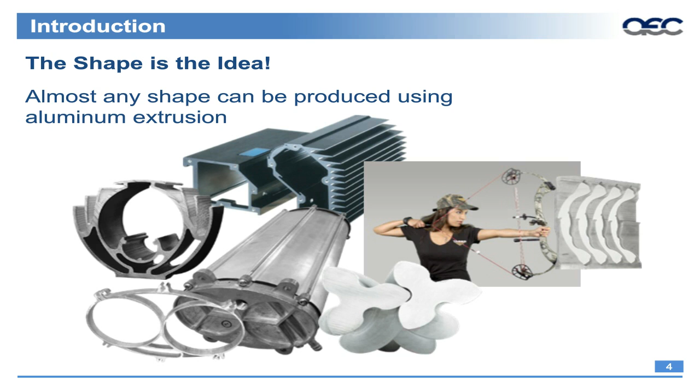As an introduction, we'll talk about the right geometry. We'll also talk about the alloys and the designer's use of fabrication and finishing to create effective product solutions.

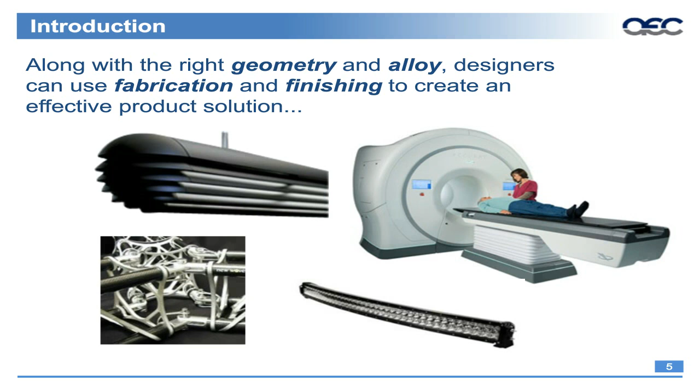On this particular slide, we have highlighted four examples of different uses of design and alloy characteristics and fabrication operations within aluminum extrusions. In the upper left-hand corner, you actually see an LED light where that outside diffuser cover is a fabricated anodized aluminum extrusion. In the bottom left, we have the nodes creating the structure of that particular part, as well as heat sink applications when we're looking at MRIs or CAT scan machines, and also LED light bars.

In addition to the functional and decorative applications we see today, we're using aluminum extrusions in high-intensity LED applications, such as the medical light you see in the upper left-hand corner, as well as intense structural applications as with the Ford F-150 in the upper right corner. The decorative application is in the bottom right with the fencing structure. We'll talk about that later in the presentation, as well as decorative finishes in consumer electronics, where you look at the new Apple Watch with the extruded aluminum and anodized case.

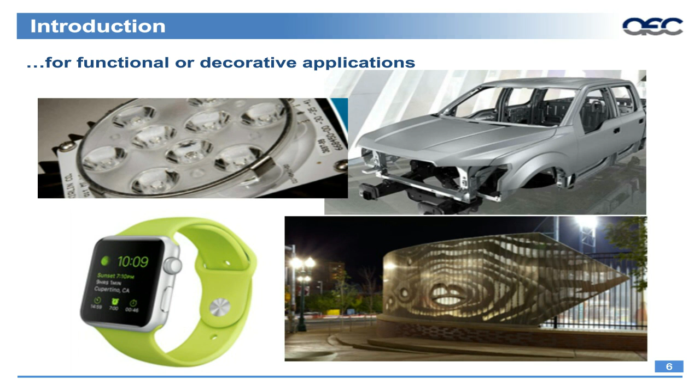Overall, the extrusion process is fairly simple. We're talking about forcing a material through an opening in a piece of tool steel. A very simple example of this is the Play-Doh press. Here you can see the Play-Doh press, which maybe our children or we as children played with as a youngster, where you have shapes cut into that plastic piece that sits at basically the mouth of the press. The Play-Doh or the material is put in the back, and then it's forced through that hole.

So the material itself has no choice but to come through that hole and to take the shape of the opening that was cut. An interesting thing about the aluminum extrusion process is what most people want to know is

How do we create hollow profiles? Hollow profiles are relatively simple in that when the billet is forced through the die itself, the die is fixed with a mandrel in the middle, and then you would have the bracing for the mandrel on either side of the larger opening. The billet itself, once it's forced through that opening, is actually broke into two separate or sometimes multiple pieces. And then as it flows back through the larger opening, is basically welded back together and forms the tube, as you would see in the lower right-hand corner of the screen.

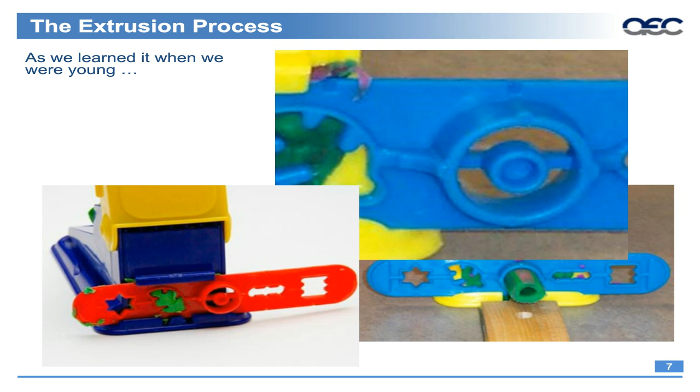So again, the extrusion process, as we know it today as an aluminum extruder, is much the same. We have a preheated aluminum alloy billet that we force through high pressure through a piece of tool steel. And then as that material flows through the tool steel, it takes on the shapes in the pockets, and then it emerges from the press in the desired shape that was created as it flowed through the die itself.

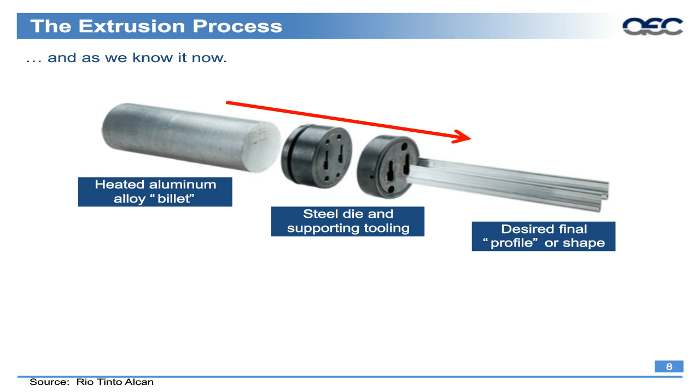Here's an overview, a very basic overview of the extrusion process. As I said before, we start with the heating furnace, where we'll preheat the billets, or in some cases logs. Those are then placed into the extrusion press, which is where the die is fixed onto the front of that press. So in this particular illustration on the far right-hand side of the extrusion press, once that billet is forced through the press, the die, it'll emerge onto a runout table and can most times be a couple hundred feet in length. There would be a rough cut sawing operation on that particular part there, and then

the long length extrusion would be presented to the stretcher, and the stretcher will pull it, clamp onto both the front and the end of the profile and stretch it straight. A finishing saw operation will cut it to a shorter length than what was extruded, and then the extrusions will be placed into the aging oven, where they will receive their final temper.

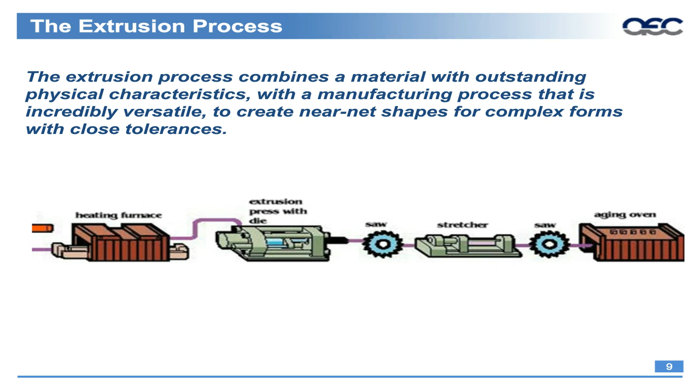As part of the extrusion process, we also put into the parts themselves is where they receive their temper in the final age oven practice, as well as how we treat them as we are extruding the profiles. Here you can see some of the typical tempers that are referenced within extrusion. The most common being the T1 through T6. Those would typically be the most common tempers that you would see associated with the different alloys that are produced.

There are some other tempers, as in the O temper, which would be for fully annealed material, which could be things like impact rod and or parts that need to receive a severe bend. F temper material, which would be things such as forging stock, and then the strain hardening tempers like an H112, which actually receives some hard working after extrusion.

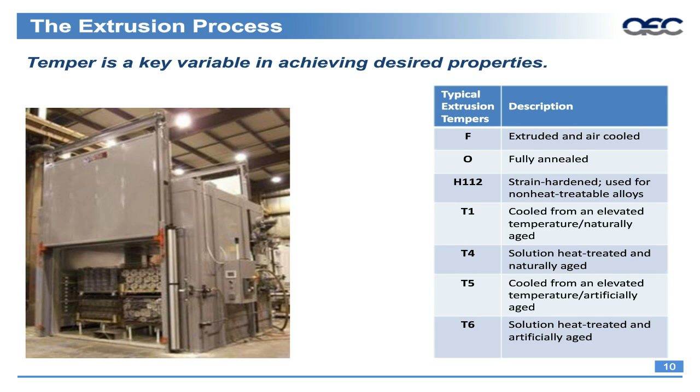However, some of the most important as we talk about aluminum is the high strength to weight ratio, its conductivity properties, as well as its suitability for integral shapes and production to close tolerances. Also talk about the decorative attributes of aluminum and extrusions, as we can apply many different finishes to the parts. And then the ease of fabrication.

So as we go through the next part of the presentation, we'll talk about several different products or projects that have utilized aluminum extrusions to create an efficient part.

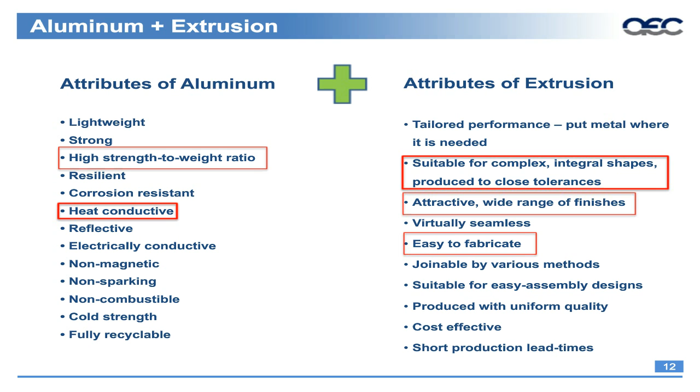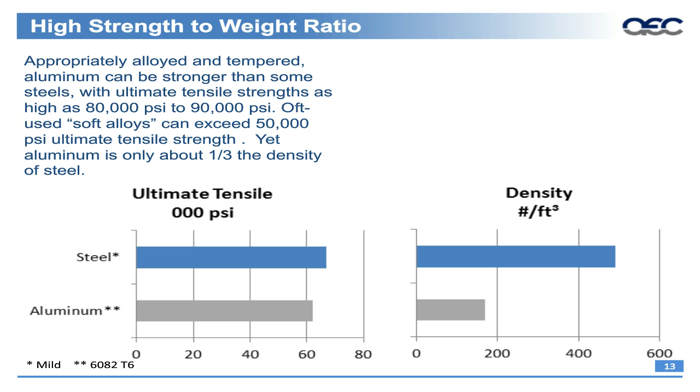With the high strength to weight ratio being a key attribute to aluminum, we can see here that in some alloys of aluminum, this one in particular is 6082 alloy, which is a structural alloy in comparison with mild steel. You can see that the ultimate tensile strength is much the same. However, the density of steel is much greater than aluminum. So when you look at it on a strength to weight ratio, you can sometimes yield a part that is almost nearly as strong as a comparable steel part, yet is a third as dense as steel, and therefore will typically weigh sometimes as much as half the weight of the steel part.

So one of the industries right now that's really taking hold and working on a lot of conversions of not only steel to aluminum, but different forms into extrusion—casting to extrusions, forged parts into extrusion—is the automotive industry.

In the automotive industry, weight is key in creating efficient vehicles, reducing weight while also making them stronger and safer. Here we see a couple applications in use today: a Ford F-150 roof bow, a Tesla Model S roof bow below that, and the C7 Corvette frame, which is an aluminum structure that's 90 pounds lighter but 60% stiffer than the prior steel construction. As we talk about more efficient vehicles, we need to create stiffer and, most importantly, safer structures for the automotive industry.

But key to this is not only the aluminum material, but also the profile design. As you can see in a lot of these profiles, specifically in the Tesla Model S roof bow on the bottom, the wall thickness of the part is not uniform around the entire profile. With an aluminum extrusion, you can actually move the metal and only put material where it's needed. This creates not only a stronger structure by customizing where material goes, but also a more cost-effective structure since you're not using more material than necessary.

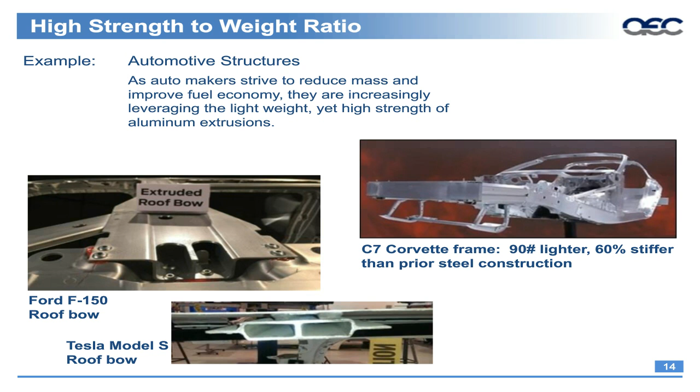Here's an example of a bridge application. In building and construction, weight is important not only because you need to transport the structure, but also because you're assembling it in the field. With this particular application, you're transporting it into remote locations by truck or helicopter, which makes a lightweight structure very important. You're also looking at quick assembly—putting up a bridge in only an hour and a half with a relatively small number of workers, in this case 10 to 12—yet it can span up to 60 feet.

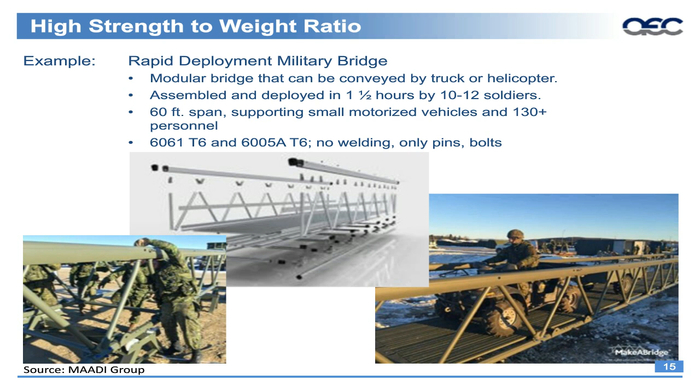It uses nothing out of the ordinary as far as alloy and temper: 6061 T6 and 6005A T6 are both very standard and commonly used in extrusions today. There's no welding needed—it's assembled only with bolts and pins. So this is an example of design coming together with the attributes of aluminum to make an efficient, relocatable structure.

Another interesting point about aluminum is that as it gets colder, there's no adverse impact on the material itself. That's important for this gentleman on his snowmobile doing a flip, where the aluminum structure operating in a cold environment won't crumple when he lands. A better real-life example is a plane operating at altitude, where it's negative 70 to 80 degrees Fahrenheit—not a place where we want brittle material. Aluminum is key because it not only gains strength as it gets colder, but also becomes more ductile.

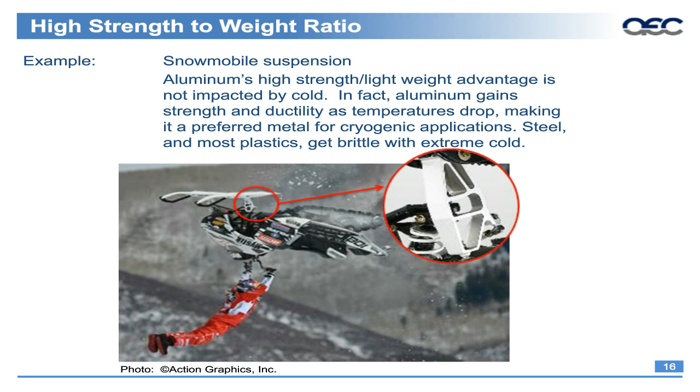Going further on conductivity, specifically of temperature—aluminum is a very efficient conductor of temperature as well as electricity, but here we'll focus on the temperature aspects. We have three separate graphs. From left to right, we see the thermal conductivity properties of aluminum compared to brass, copper, magnesium, nickel, and silver, with copper and silver being better than aluminum in thermal conductivity.

The next graph is density, where aluminum is actually less dense, while some metals are among the highest density—only magnesium is less dense than aluminum. When you combine the two into a value calculation, the biggest bang for the buck actually comes from aluminum, because it has one of the lowest densities plus is one of the better thermal conductors. Bringing those features together gives you a very efficient thermal conductor, which is why you'll see aluminum extrusions used from LED lighting to heat sinks to cold plates to electrical enclosures, plus other types of electrical bus conductors.

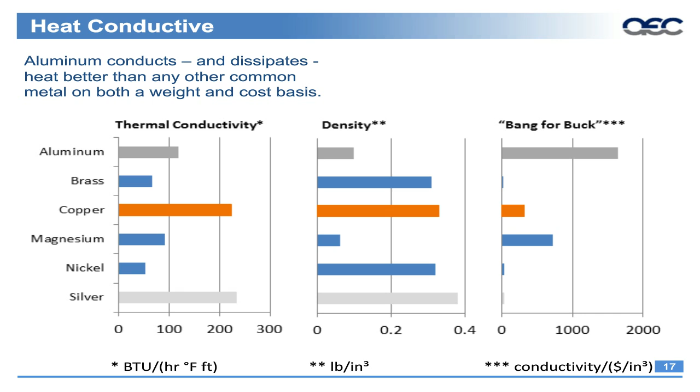So here again, with the relative ease of design and production of an aluminum extrusion, that's why you'll see it in all those various thermal products I just mentioned.

One other important attribute of extrusion is that it's a forging operation. When you compare forging to casting, you'll see much less porosity in a forge than in a casting. In a heat sink or conductor application, porosity is a very important factor in controlling the efficiency of that unit. Typically, just by switching from casting to extrusion, you gain something like 5 to 8% efficiency simply from the change in production method.

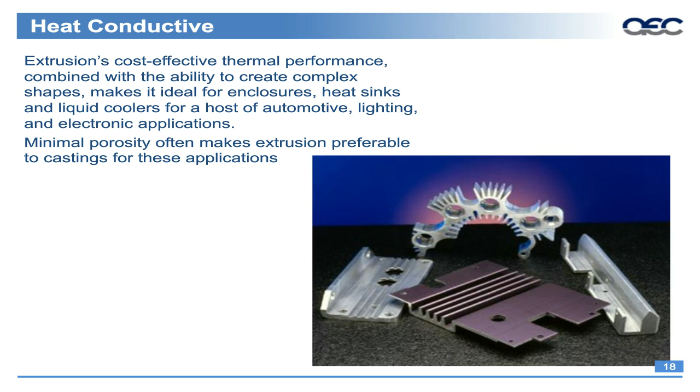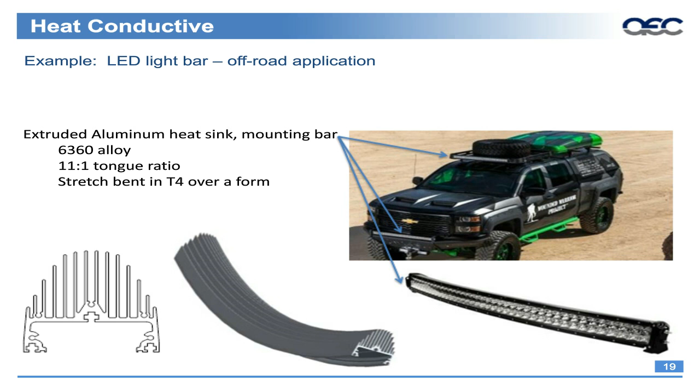a T6 condition, so it can mimic the front end of that vehicle that it's been installed on. Again, using the formability and the ductility of aluminum along with the thermal properties of aluminum. And in this one, it's also anodized black, so there you're using the finishing attributes of aluminum to be able to create a part for an off-road automotive application.

Here's another one in the automotive or transportation space. This in particular is a motor housing for a truck or a bus. Here you would have one of these motors on each of the drive wheels of the vehicle. It's important to note, so here obviously we're using the thermal attributes of aluminum itself, but then we're also using

the extrusion benefits in being able to create hollow profiles. This picture is not detailed enough, but inside each one of those profiles you would also see serrations, which increase the surface area within those hollow profiles, which helps make the heat sink properties of this profile better, in that there is fluid being passed through those channels in cooling this electrical motor that you see there.

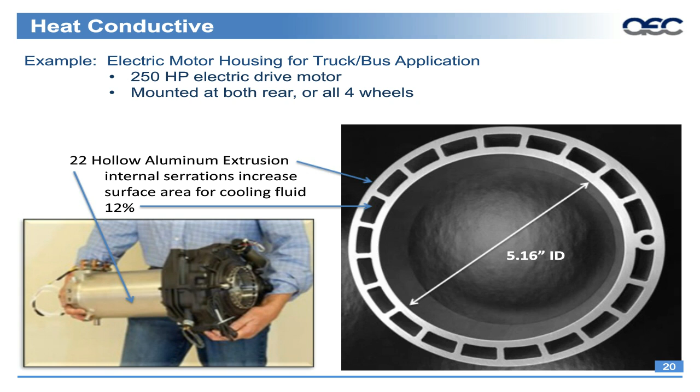So again with the heat conductive properties, here's one where we've actually utilized the extrusion properties and, let's say, tips and tricks within extrusion and how you join extrusions or affix them onto other parts. In this particular heat sink, the heat sink on the right is mounted onto the back of the LED light source on the left, and they've actually placed screw bosses at the required positions within the extrusion itself to be able to mount directly onto the LED light board with no additional machining required.

And again, as with the motor housing before, if you could see the individual fins here, you would actually see the serrations that were put onto the fins to increase the surface area, making it a more effective conductor of heat.

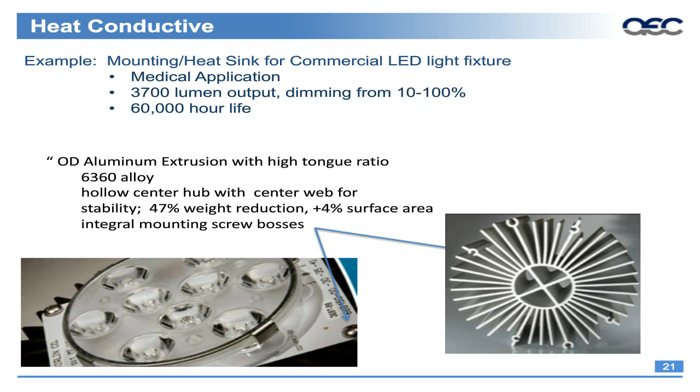Again coming back with the heat conductive, this is an interesting case in that you have one extrusion on either side. You can see it in the bottom left-hand corner of that picture there. So it's the same extrusion put on either side of the assembly. This is an illuminator viewing hood housing for a steam water gauge in an industrial application.

So in this one, taking advantage of the design characteristics and the ability to extrude complex profiles, they've actually added in all the particular bolt slots, screw bosses into the extrusion itself, and have basically eliminated 30 to 100 welds depending on the size of the unit in question. So it goes together through

a slip assembly. And then with this one, they also added the cooling fins onto the extrusion itself. So the only thing really you have to pay for there is just the additional material that goes into the cooling fins. Those are just added as a natural part of the extrusion process.

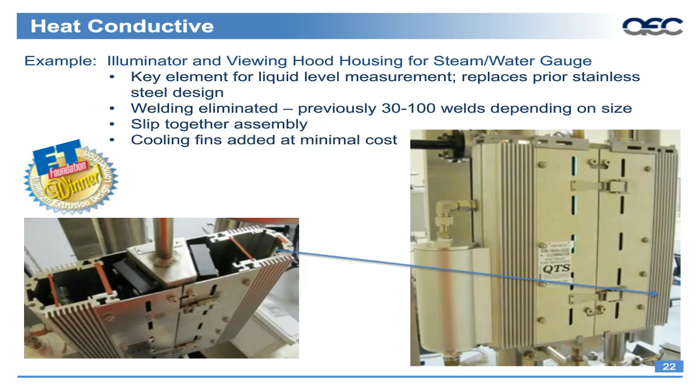The next several slides will begin to talk more about these integral shapes. This is just a picture of what we call the idea profile. It's not really a real world profile that's used anywhere, but it does give you the idea of all the different types of mating features that could be put into extrusion, from a hinge detail to screw bosses to bolt or rivet slots,

to then the decorative fluted appearance that you would see on the bottom left-hand corner of that extrusion, to snap fit and just the heat sink. So it gives you, in one shape, a lot of the different features that you can build right into aluminum profiles.

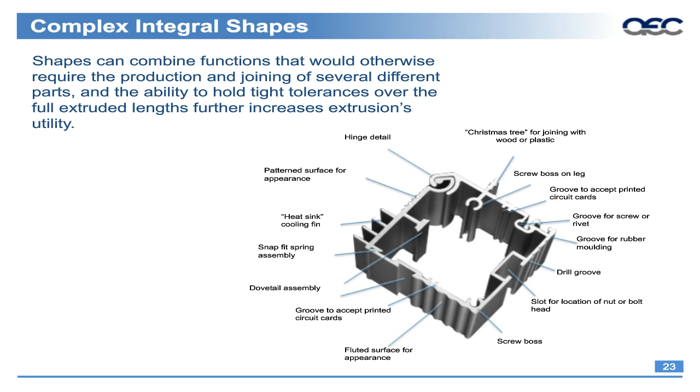As we start talking about the aluminum profiles a little bit more, we start talking about the integral shapes. A little bit later in the presentation, we'll talk about the economics of a shape and the cost associated with the development of the different dies and everything that goes together.

So like with the automotive applications before, this is an instrument panel beam. One of the interesting things about this is that these particular beams, obviously there's one in every car, but they're very part intense. This particular one for extrusion uses 19 separate extrusions to make up all these different support structures as well as the brackets that go onto it.

But the interesting thing about this, and what we'll talk a little bit more about later in the presentation, is to do this in extrusion with the extrusion tooling required is much more cost effective than it would be to develop individual stamping dies, casting dies, maybe some forging dies, depending on the requirements of the parts. We can easily do it very quickly and very economically with extruded aluminum profiles.

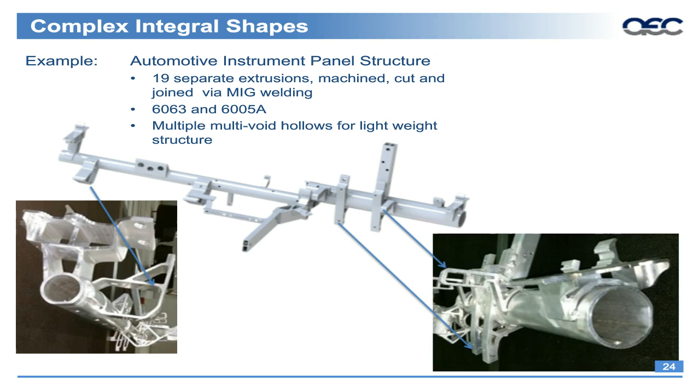Here's another one in a healthcare application where basically you have telescopic profiles. Here you have basically 3 to 4 different profiles that will come together that will create this structure on the left-hand side of the screen, which goes across and enables the movement of people out of beds or in and out of chairs if they're unable to do it themselves. Just a few profiles integrated together can create a very modular structure that's able to be customized depending on the setting it's installed into.

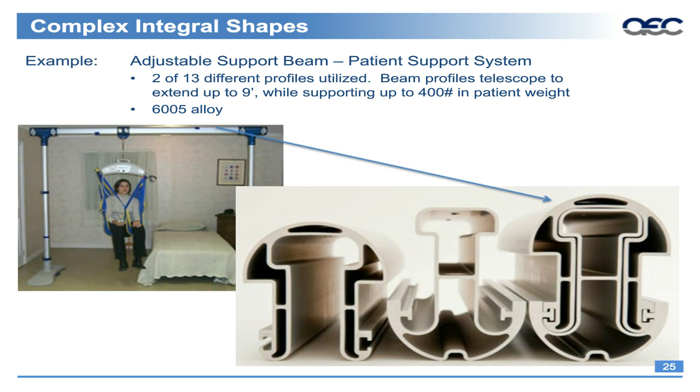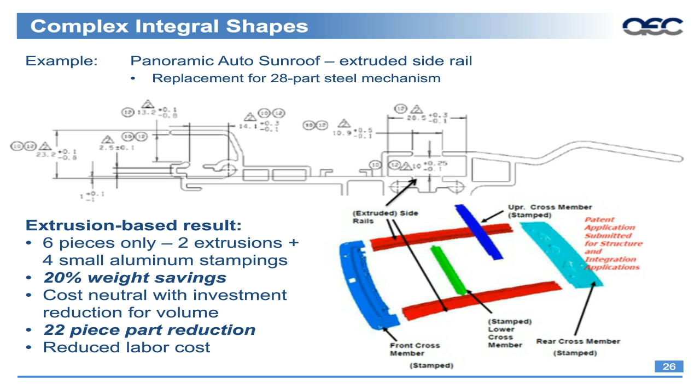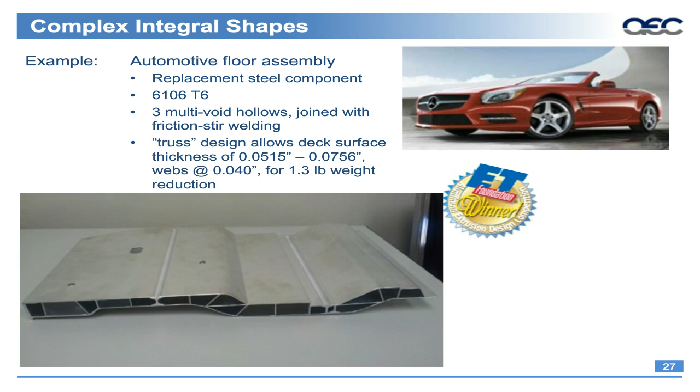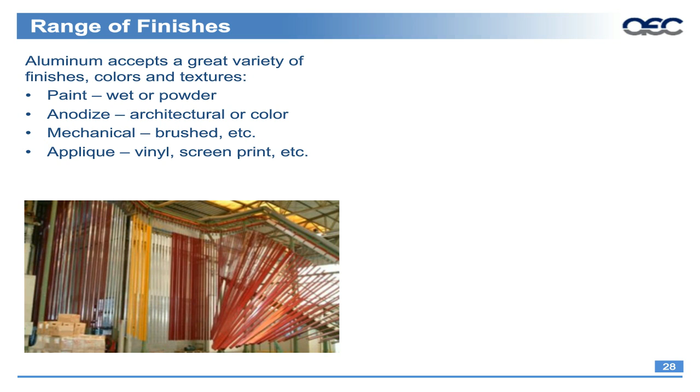So aluminum accepts a wide variety of finishes from paint, either wet or powder, anodize, from architectural clear to the bronze and the blacks to the high vibrant colors that you'll see, mechanical finishes, brushing and polishing, as well as screen printing or vinyl printing onto the extrusion itself.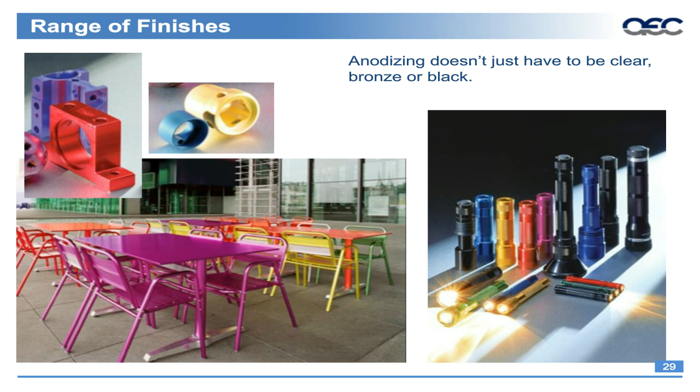Again, talking about the range of finishing, anodizing doesn't have to be just clear, bronze, or black. There are many decorative finishes that can be used, as well as industrial type coatings that you'll see on things like hydraulic cylinders and other parts like that. A very wide range of finishes that can be used in aluminum extrusions or with aluminum extrusions.

Again, another example of finishes. This one is a particular company based in Minnesota where they're using the high-end architectural finishes for finishing out commercial spaces.

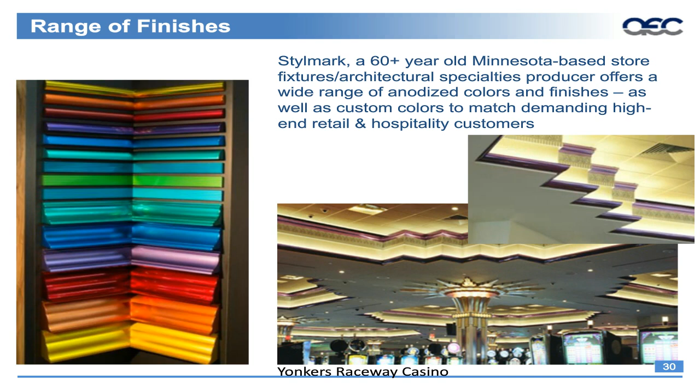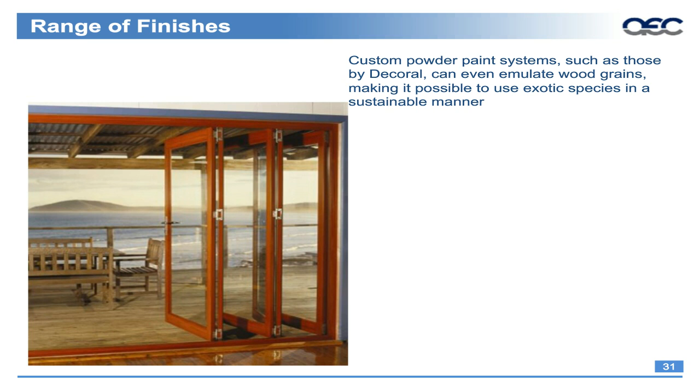The Decoral finish is a particular finish of interest where that is applied. It's a combination of, let's say, basically a printing as well as powder coating or paint that comes together to create simulated different types of wood grains to stone finishes to many different things that can be applied to the profiles themselves, and really it mimics the natural finishes of those different materials, but in a sustainable manner.

Talked a little bit about this one before, which was a new project that was just installed this past spring, which is basically a fence around a baseball field down in Texas. In this particular one, we start talking about ease of fabrication. This is all one extruded aluminum profile that has been assembled together, but then the pattern in the fence is basically machined into the part. Some very unique things that can be done in architectural applications just in the fabrication of the part itself.

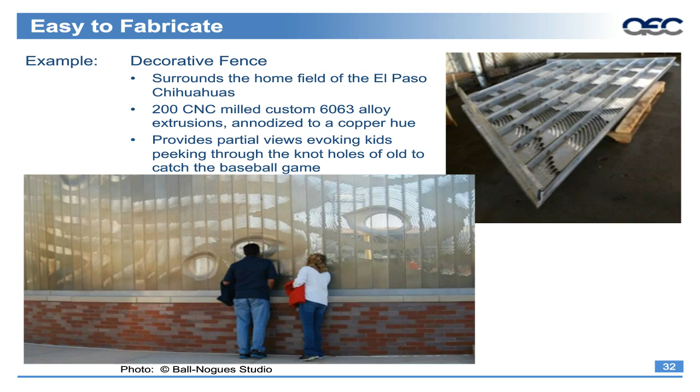As I mentioned before, there's a cost-effective aspect to aluminum extrusions, and here we'll talk a bit about the production cost of the tooling itself, as well as the time it takes to create that tooling. Aluminum extrusion has the lowest tooling cost of any of the metal forming processes.

So here you can see how this typically applies to stampings or moldings, die casting, roll forming parts, where you really have a huge upfront investment into the tools themselves. Now for aluminum extrusion, it's really governed by the size of the press.

A smaller press, die costs may be between $500 to $1,000. When you get into very large profiles running on, let's say, 16-inch presses and above, your die costs are going to be far in excess of $5,000 - probably more like $10,000 to $15,000. But as you compare it with larger parts and other metal forming processes, you're going to see a lot of difference there too. Typically the aluminum extrusion die cost is one of the lowest in metal forming operations.

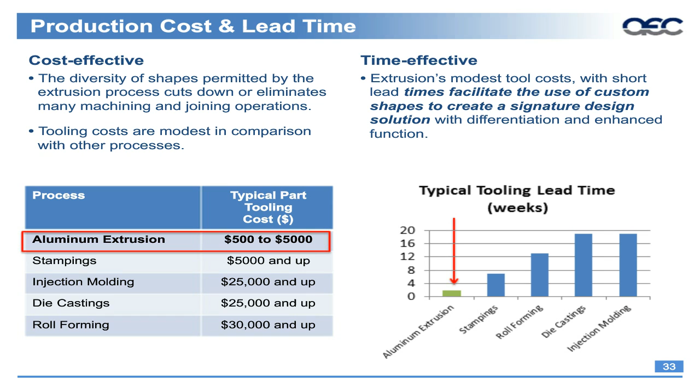There's been a lot of discussion over the years about the sustainability of aluminum. One of the key attributes is that it can be recycled over and over again without degradation. Recycling is a key part of the aluminum extrusion industry because it only requires 8% of the energy to recycle aluminum back into a new product compared to creating virgin aluminum. Obviously, the most energy-intensive part is creating aluminum from scratch.

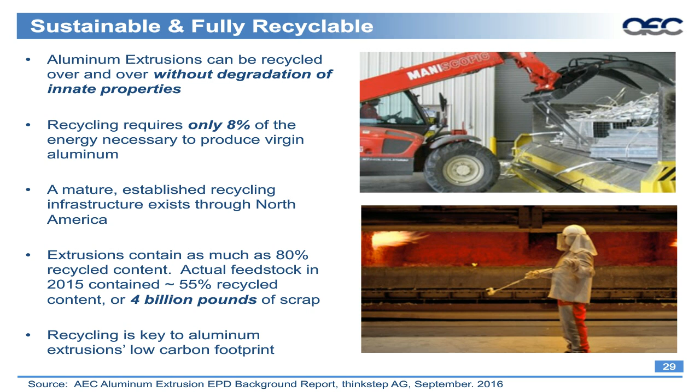Again, with sustainability, through the AEC we have just completed an environmental product declaration, which is available on aec.org. That'll take you through many of the different recyclability and sustainability opportunities with aluminum.

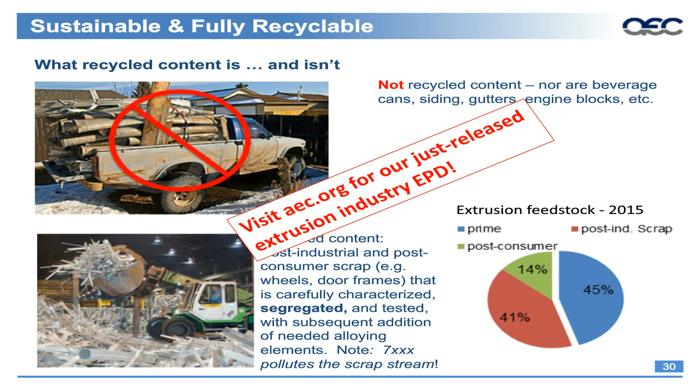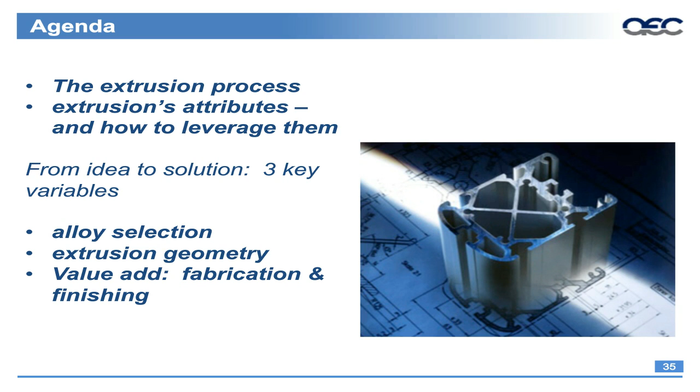For the second part of the agenda, we're going to focus more on the actual design of the parts themselves. So we'll look at alloy selection, the extrusion geometry, and finally the fabrication and finishing.

Some things to consider when we start talking about alloys: most of the time, what we're talking about in soft alloy aluminum extrusion is the 6000 series, which is by far the largest group, offering many different varieties of aluminum alloys within that series. The 5000 series is mostly your sheet and plate alloys. So 6000 is really when we're talking about soft alloy extrusions, where we focus.

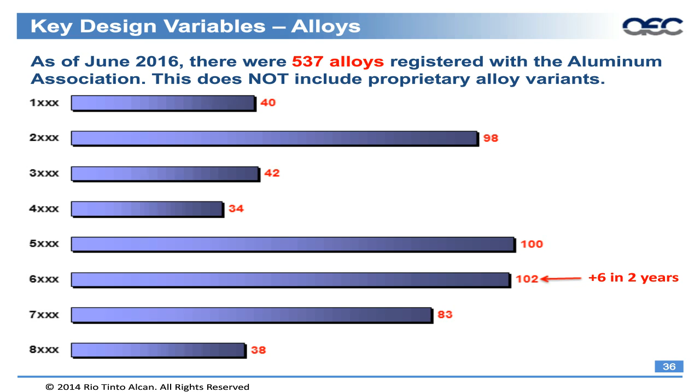6000 series typically uses magnesium and silicon as the main alloying elements. Within the 6000 series, we have good strength, good corrosion resistance, machinability, weldability, and formability. It's also heat treatable, which is key within our process to achieve all the different tempers that are required.

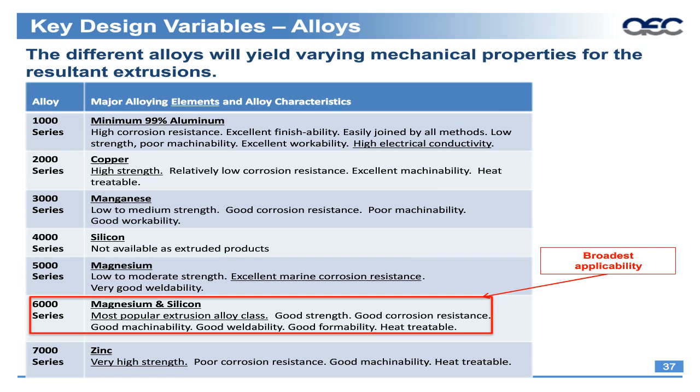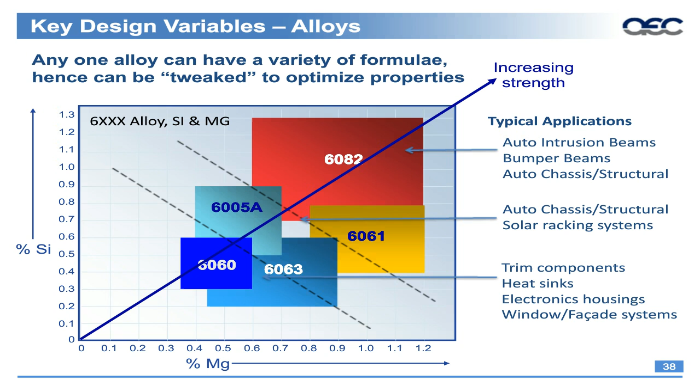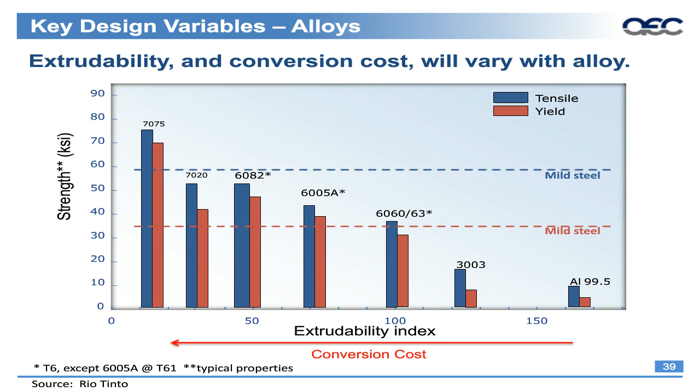It's important as you start to understand what the requirements are for your alloys, so you can select the appropriate alloy. Your extruder partner is there to help you make that selection, depending on the size of press it's going to go on, the end-use application, and the secondary finishes or fabrication operations that will be done to the part. All of those will drive your alloy selection as you're making the parts.

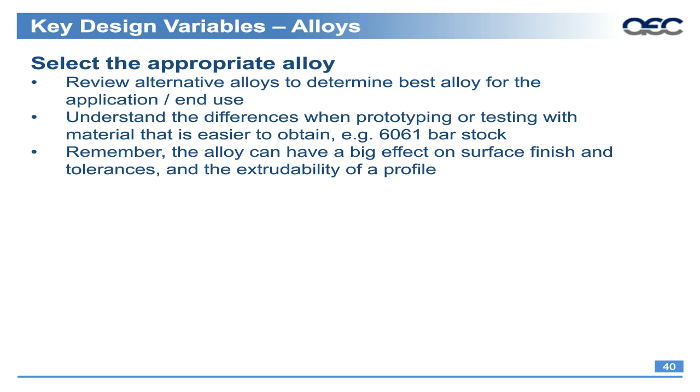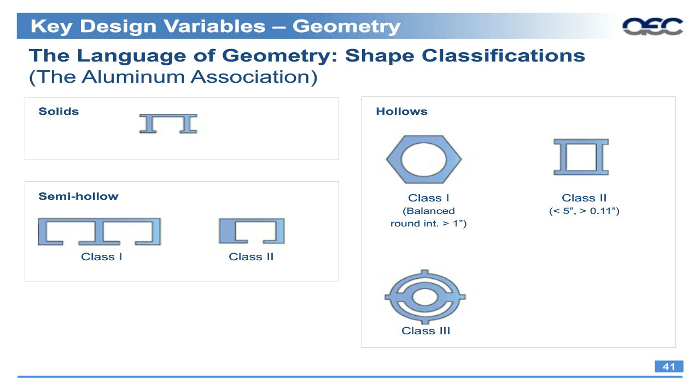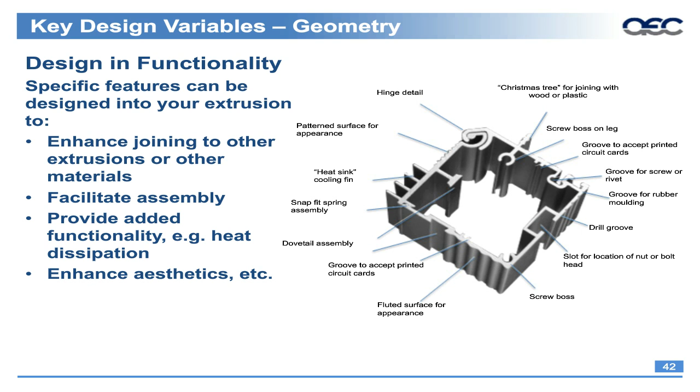Back to the idea of profile design and talking about design functionalities, which is key within the geometry. It allows us to join other extrusions together, facilitate assembly, provide additional functionality, and enhance aesthetics, all designed into the extrusions themselves.

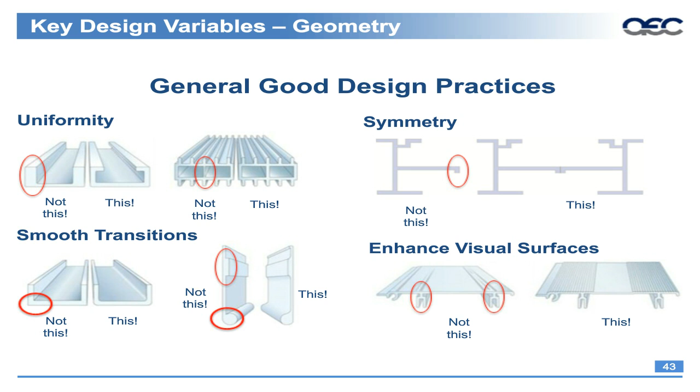For good design practices, we typically want to stay away from certain things. We like to have consistent wall thicknesses throughout, smooth transitions, and uniform profiles. That's not always an option; this is just a good-to-have that we'd like to see, but we can work around most requests.

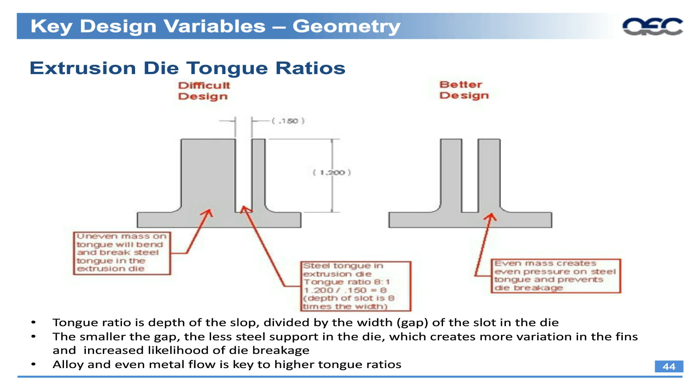Die tongue ratios are very important to us when we talk about the extrusion die and its wearability, because the extrusion die is basically a negative - everywhere you see aluminum corresponding on the die, you'd see a piece of steel, or you won't. So it's very important to discuss die and tongue ratios when we look at design and the type of tooling needed to make the part.

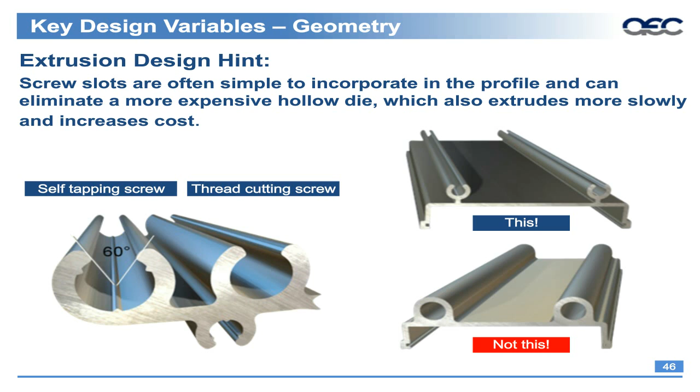We also talk about balancing and ways of getting rid of internal voids, making sure we have generous radius corners, getting rid of hollow voids in the middle, and if there are only pockets there to accept a piece of hardware, we can break that surface and have a solid profile there instead of a hollow one.

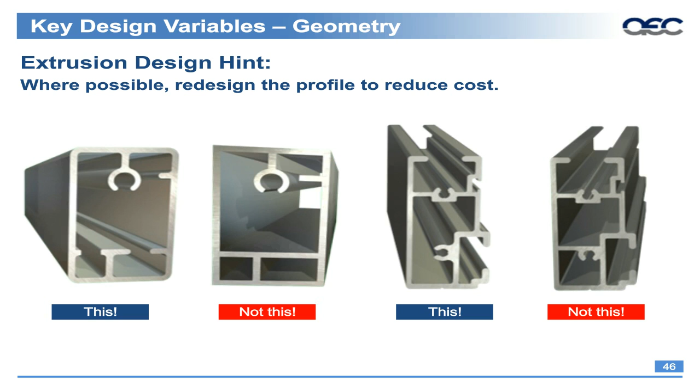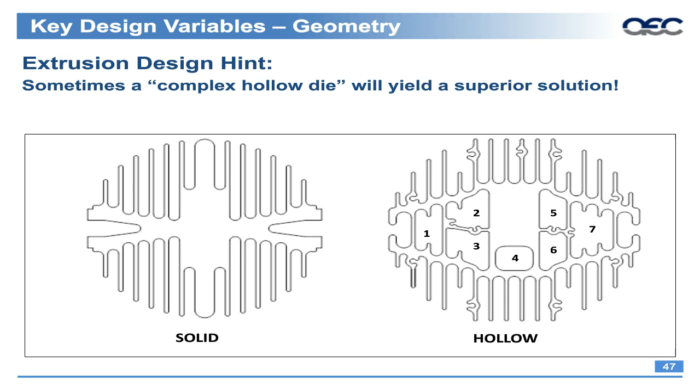Here's another instance where a hollow profile is actually better to produce than a solid one. In this case, we went from a solid profile with very high tongue ratios and added seven voids, but shortened the tongue ratio, added screw bosses, and added assembly features to make a better solution. Plus, with the added voids, we increased the surface area of the part, so it's actually a better heat sink than before.

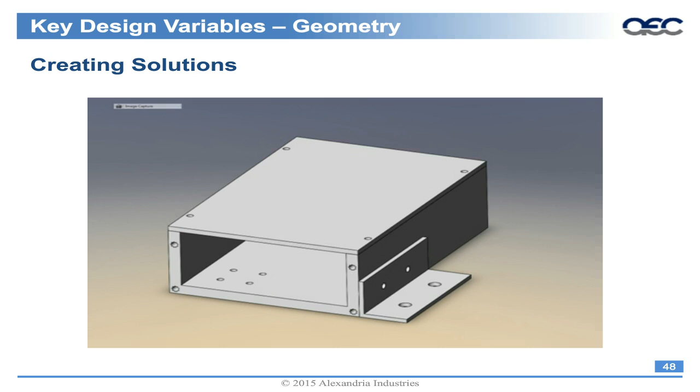So we're talking about solutions in design and geometry. Here's an enclosure example with three different pieces: a top, a bottom, and a little L bracket off to the right holding it in place. Instead of making three different pieces, we can work on combining pieces and creating features into the part, so instead of three, now we have two.

We impart some of the mounting with machining and add a heat sink, or increase the surface area of this electrical box, to increase its thermal conductive properties. We added the top lid, added lines to help with the aesthetics of the part, and added the hinge feature and screw bosses on the side so we can cap off the enclosure and get everything assembled and put together.

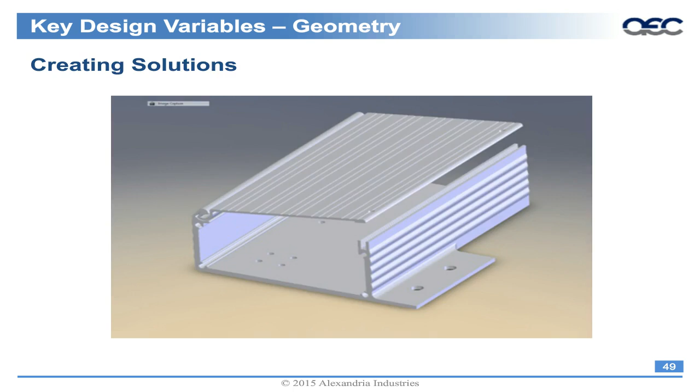Tolerances is usually a very important part that we like to cover through the initial design process. It's always good to understand what is needed for functionality, the critical features and tolerances. We'd like to have those designated up front, and apply the appropriate tolerances for non-critical or non-functional features. It's one of those things where we can't tolerance everything on a part. It's just not feasible to check. Plus, is it really required? So understanding what you need as you go through.

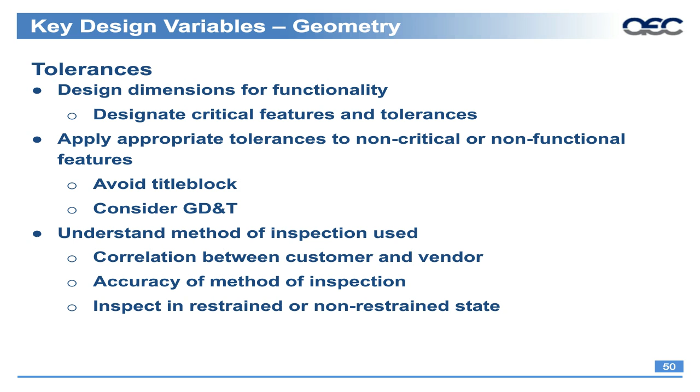Another important part is to understand the inspection methods that we typically use as extruders. A lot of the initial inspection checks are done in line at the press as the extrusion is emerging. We do have a lot of parts that we run SPC data collection on, but that basically happens after the fact, using different vision systems and things like that. So a lot of it is understanding what we have to check at the press so we have a good chance of being successful with the part once we get to the end of the production process.

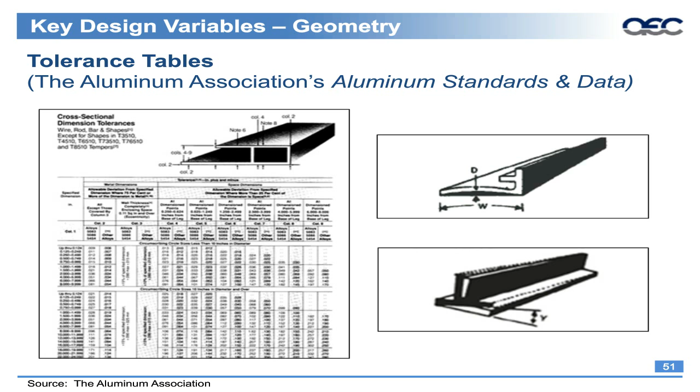The Aluminum Association standards and data, you'll see this referenced a lot when you receive a print back from an extruder. We'll reference standard Aluminum Association tolerances - that's this table right here. It's available from the Aluminum Association, or even your extruder partner should be able to get you a copy of that. It basically covers everything you would need to know about typical tolerances for aluminum extrusions.

We'll start mostly with standard tolerances. We have cross-sectional tolerances - twist, straightness, flatness. A newer part within the last few years in the standards and data book is actually the precision tolerance guide. So there's a standard tolerance column, and then there's also a precision tolerance, which is typically 2/3 of standard.

At the end of the day, we can usually work around those standard tolerances. Depending on the alloys and the features, the press size and different features of the profile and what's going to be required to produce it, we can usually do better than standard tolerances. But most likely the best that we're going to do in a high volume scenario is get down to a half-standard situation with the tolerances. You can do better depending on the press and the size of the shape itself.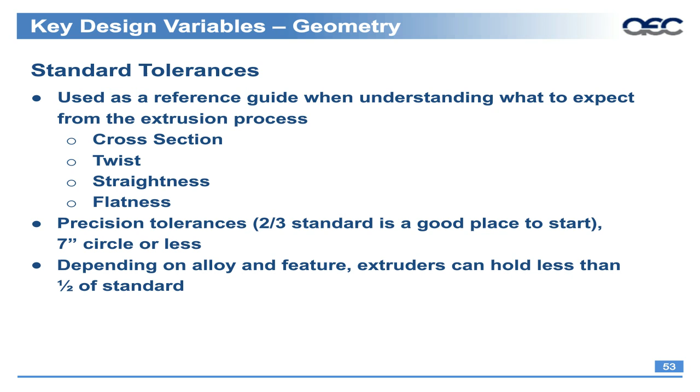So again, we start talking about variation. We try to reduce variation as much as possible through the process, but it's really dependent on the shape. We have to be very careful when talking about the geometry. All these different attributes do determine what we'll be able to hold when it comes to the tolerances of the shape and the variation you'll see along the cross section.

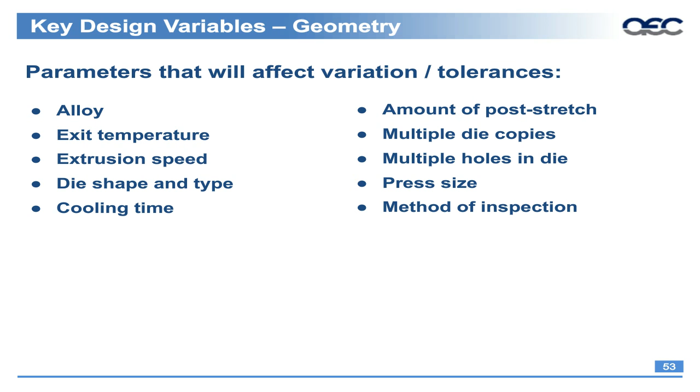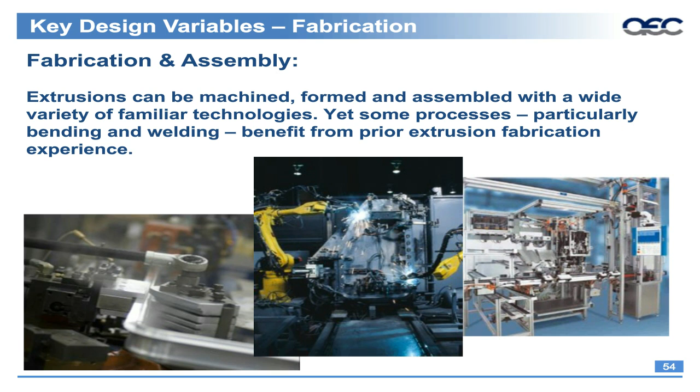Fabrication and assembly - obviously most everything that happens out there, there's something else done to it along the way, whether your extruder is doing the machining, punching, bending, or something else in the assembly operation. At the end of the day, extrusions, and specifically aluminum, are very easy to fabricate and assemble.

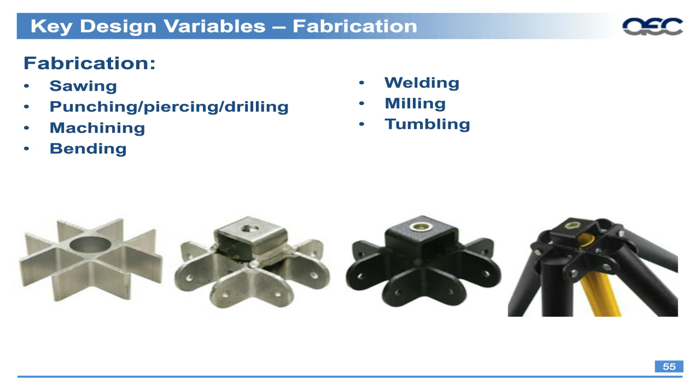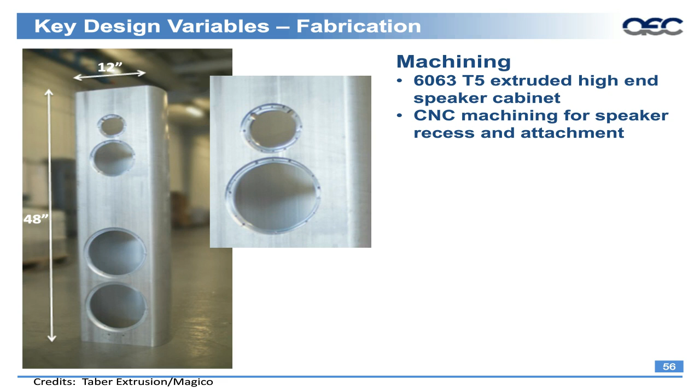Using the attributes of aluminum, here you actually have a speaker cabinet where the whole speaker cabinet is machined and basically tuned to the specific part. We do a lot of machining for engine mounts and different parts like that - replacing castings, which is actually an extrusion replacing a casting. Depending on the casting process, it's much more efficient and quicker than having a cast part.

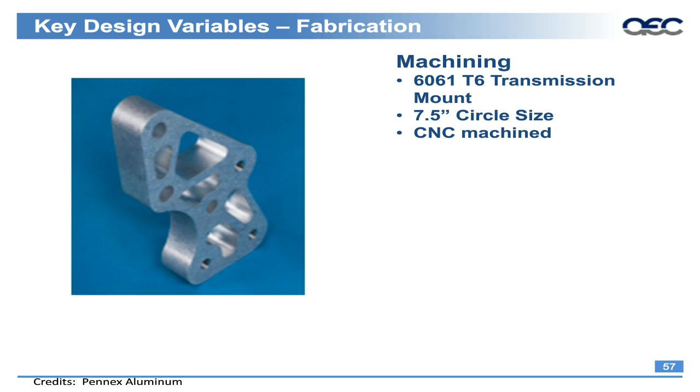The range of finishes that we're talking about, we really need to talk about the design. There are things that happen during the flow of the extrusion process, so we like to look at it, especially if it's a hollow profile - the internal features of the profile - so we can minimize the transition areas between the internal walls and the show surfaces, because we don't want any flow lines or anything exposed on that.

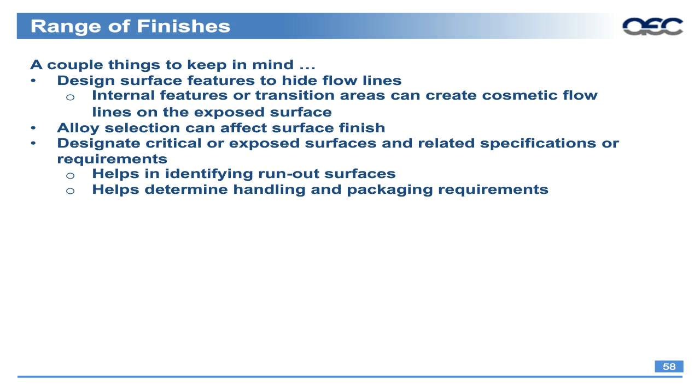Alloy selection is a big part of the finish and the final finish you'll receive. For more decorative finishes, you're going to see those are going to be the 6060 or the 6063, which are on the lower end of the strength scale. But because of that, they're much cleaner alloys, so they'll extrude with a much better surface finish. So the final point is just to understand what the show surfaces are, what the exposed surfaces are for the part. That's going to help the extruder determine what the runout surface is and how we're going to handle and package that for delivery to the customer.

So overall, we're talking about a holistic approach to extrusion design. Number one, the most important point is to get the extruder involved early. That'll help you save time through your iteration process and development because we can put our input in immediately at the beginning and help steer it in the right direction.

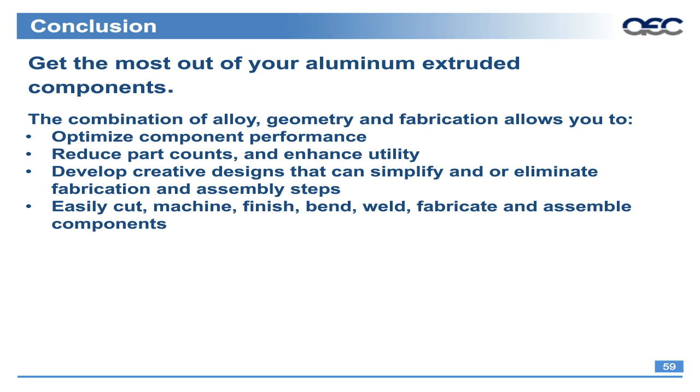So we end up with a part that's economical for us to produce and for the company to purchase. We can also enhance the utility of the part and develop designs that are simplify and/or eliminate fabrication and assembly steps on the OEM's side. So again, getting the extruder involved at an early stage is important.

Converting steel to aluminum isn't necessarily always cost effective, but you have to look at the overall total cost of ownership of the part. Many times the aluminum profile part actually saves money in the long run. We also have to have a realistic cost expectation for what that part is going to cost.

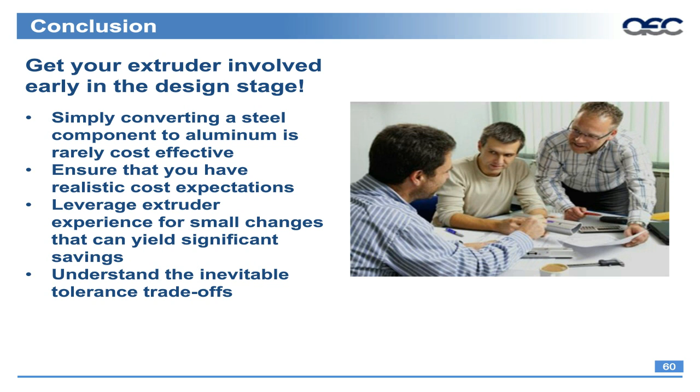The other thing is we can work to leverage the experience by making small changes to the part that will yield significant savings, and then understand what those tolerances and trade-offs are.

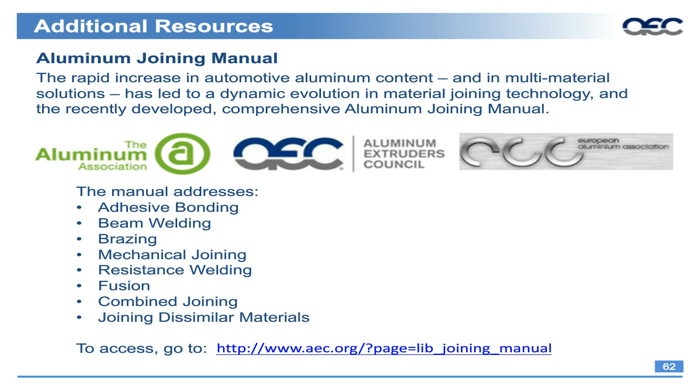The Aluminum Extruders Council, AEC.org, has a lot of helpful and insightful information out there. Most of it is free for designers to download. This webinar itself will be made available after today. Along with the Aluminum Extruders Council, you have the Aluminum Association and the European Aluminum Association. Those three work together on a wide variety of aluminum products.

So at this point in time, I will be taking your questions. Hopefully we have a few minutes left to go through that. So I'll turn it back over to Lisa for questions.

Jason, that's awesome, what a great presentation. Thank you. Before we jump into the Q&A, we have a poll question that might be popping up on everyone's screen right now. I'm just going to give everyone a moment to go through this, and then we'll get started on the Q&A. There's a big pile of questions here. I think we have a little bit of time. We might not get through all of them, but this is great.